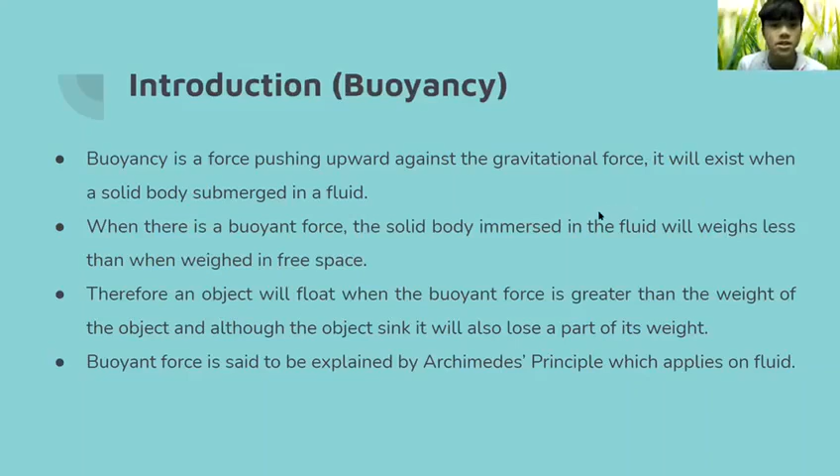And now this is the project that we are going to carry out, which is the emergency flotation system. It utilizes the buoyancy principle.

Emergency flotation system is utilized on a helicopter to maximize the chances of surviving when the helicopter is involved in either a controlled ditching or a water impact sinks.

An EFS has floats that are packed within spaces inside the airframe or fitted as externally mounted packs on the lower structure.

The floats apply Archimedes' principle, which displaces a volume of water to create enough buoyancy to lift up the helicopter when a helicopter crashes onto a water surface.

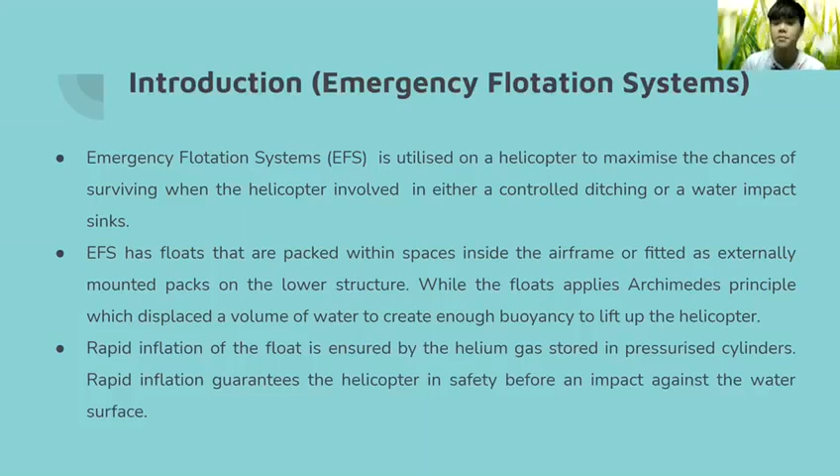Rapid inflation of the floats is important to ensure, and the work is ensured by the helium gas stored in the pressurized cylinders. Rapid inflation is important, as it guarantees the helicopter's safety before an impact against the water surface.

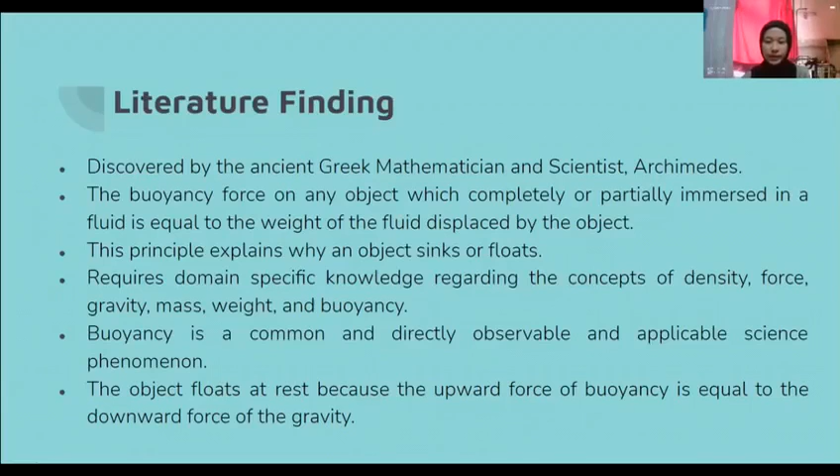This principle also requires domain-specific knowledge regarding the concepts of density, force, gravity, mass, weight, and buoyancy. Buoyancy is a common, directly observable and applicable science phenomenon. This object floats at rest because the upward force of buoyancy is equal to the downward force of gravity.

Next, I'll be talking about emergency flotation systems, EFS. These are designed to keep the helicopter upright for enough time to allow egress from the helicopter after a ditching. While there would be virtually no design possible that could mitigate against all rollover events,

a properly executed landing onto a favorable sea state should give the passengers and crew sufficient time to retrieve vital survival equipment and safely egress the helicopter into the life rafts.

The helicopter suffers from water rapidly filling up and sinking nose down due to the buoyancy force in the forward end, which is an additional hazard when the aircraft rolls over.

These flotation systems have physical limitations in that they are only rated to perform on given certain aircraft weights, sea states, and other factors. The reasons for these limitations are mostly self-evident, but relate to the ability of the EFS to provide its rated performance in the event of a ditching.

This is why emergency flotation systems are designed to keep the helicopter upright for enough time to allow egress from the helicopter after ditching.

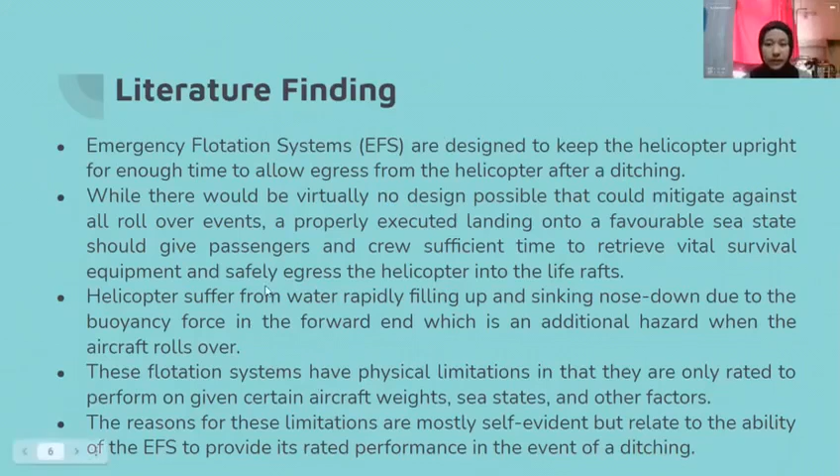Now I will explain this part, which is the conceptual part of the system. So, what is buoyancy? The Greek mathematician Archimedes expressed that the buoyancy force acting on a body of uniform density

immersed in a fluid is equal to the weight of the fluid displaced by the body, and it acts upward through the centroid of the displaced volume.

The buoyancy force equation above is used to determine the force acting on the object from inside the water. In general, the buoyancy force equation on a completely submerged object of volume V is buoyancy force equal to V times rho times G.

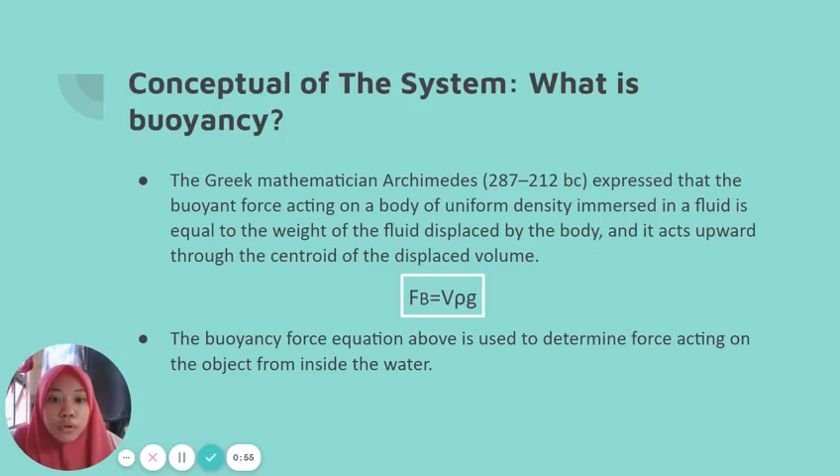In this study, we can calculate the buoyancy force acting below the helicopter. As you know, only a small part of the helicopter body will make contact with the water, so we need to calculate the volume of that part only.

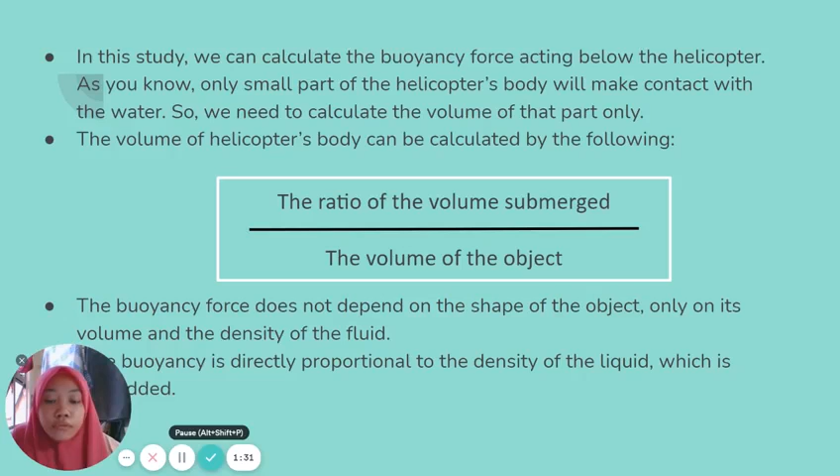The volume that sinks a small part of the object is the ratio of the volume submerged to the volume of the object. The buoyancy force depends only on its volume and the density of the fluid. Buoyancy force is directly proportional to the density of the fluid in which an object is immersed.

There are three requirements for floating. First, the buoyancy force of the flotation device should be able to keep the helicopter afloat during emergency water ditching. Therefore, float buoyancy force must be bigger than the weight of the helicopter.

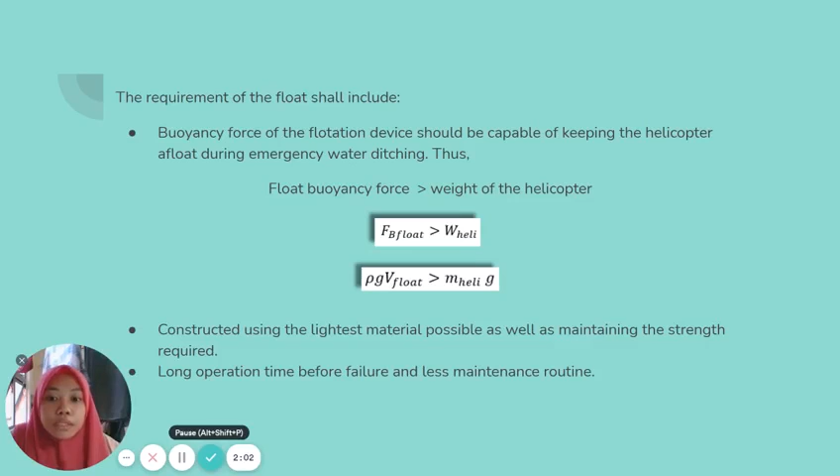Second, it should be constructed using the lightest materials possible while maintaining the strength required. Third, long operation time before failure and less maintenance routine.

For the floating device ideas, there are four points: inflatable flotation bag, inflation device and system, flotation mount and bag cover, and lastly, controls.

For the inflatable flotation bag, the number of float bags needed is 2, attached on the right and left of the skid, designed for stability up to sea state 6. The stability of the buoyancy depends on the center of gravity, which must be near the center of buoyancy.

Second, for the inflation device and system, the float bags are configured as a skid mount system and it depends on the landing gear configuration. The inflation uses helium blended with nitrogen since helium is a very light gas, which increases the buoyancy of the helicopter.

Third, flotation mount and bag cover. The emergency float bag is enclosed inside the bag cover in order to protect it. It must produce a nose-up attitude, and lastly, the bag cover must be made of waterproof materials such as nylon.

For number 4, according to FAA, the Federal Aviation Administration, there are 2 steps to activate the flotation system. First, the inflation circuit must be armed before landing. This is necessary to prevent accidental float activation.

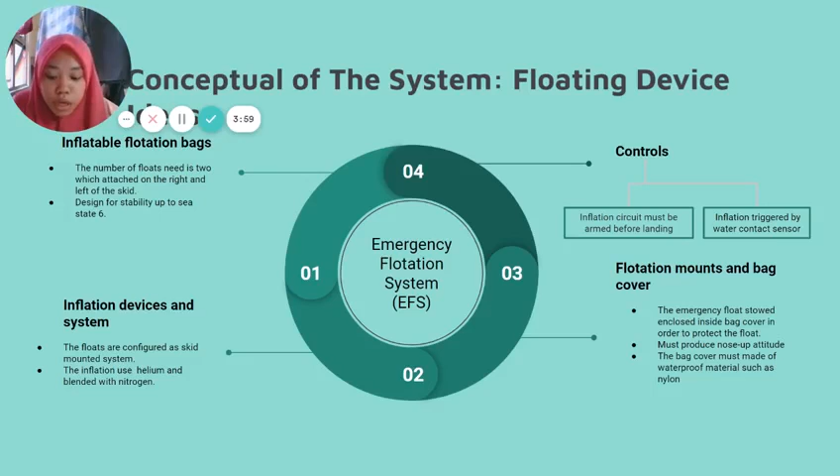For this part, I used CATIA V5 R21 to sketch the helicopter with the floating device. The dimension I used is centimeter, which is suitable for the model. I have drawn 3 models: 2 drawings, before the float inflates and after the float inflates, and also an additional improvement, which is a new design using a tri-bag floating system.

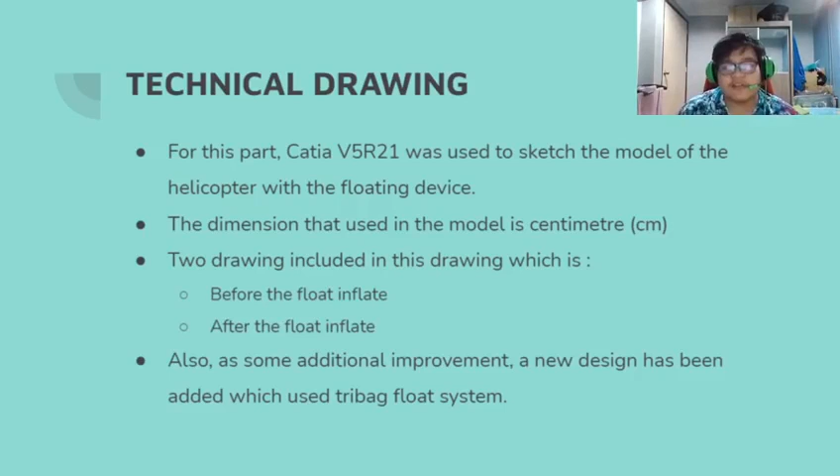So let's go. This is the sketching for before inflation, which as you can see there is a container, which contains the float that is not activated yet. So this is how the device will look.

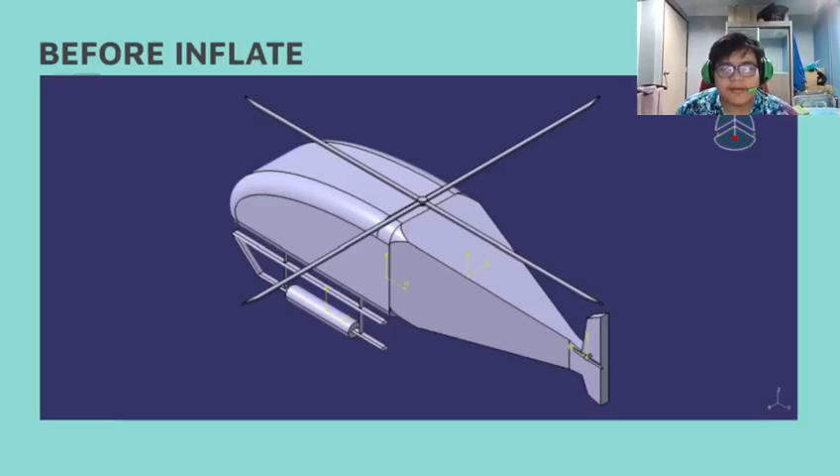Next, we go to after inflate. This is after inflate, which if the float is activated, the air in the bag will pump in, and then it will become just like a banana boat shape, but not too big like a banana boat - just a bit smaller, suitable for the helicopter. So this is the float that helps the helicopter float on the water surface.

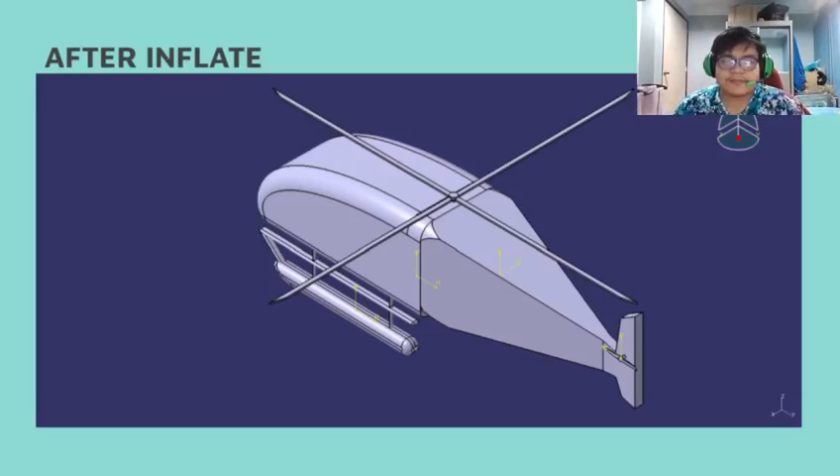Now I will go on to the float design improvement, using a tri-bag float system as the main flotation system, which will increase the value of buoyant force. If the value of buoyant force increases, that means it can support a bigger load, meaning more humans can be in the helicopter when it is floating on the water.

Next, the surface area will increase, which means increased stability of the object and also reduces pressure on the water surface. This is also good because it will remain stable on the water and will not topple down. So that is the safety aspect used in our improvement.

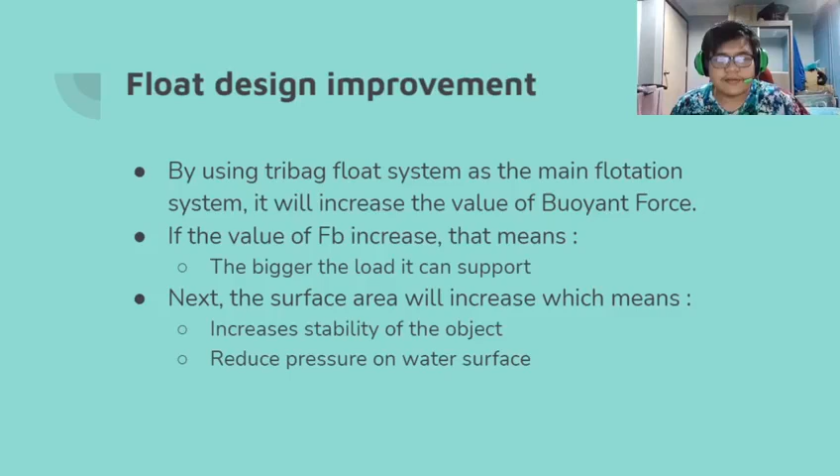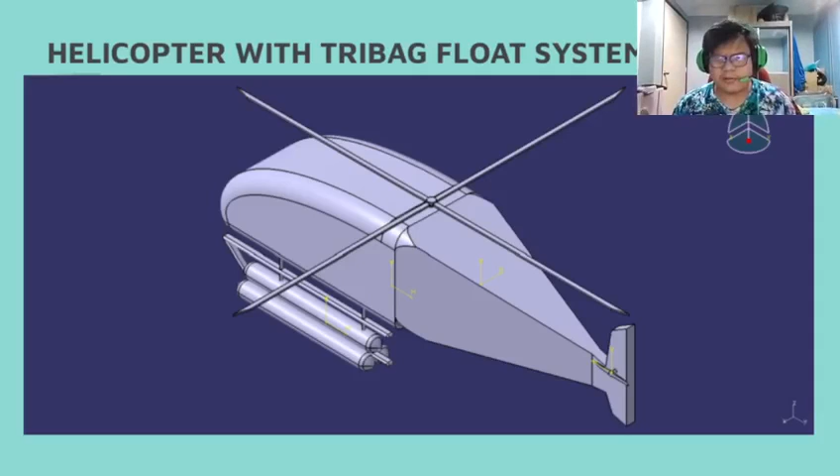So let's see the design. This is the design of the helicopter with the tri-bag float system. As you can see, there are three floats attached to each other, which gives more buoyant force, allowing it to support more load and also give stability.

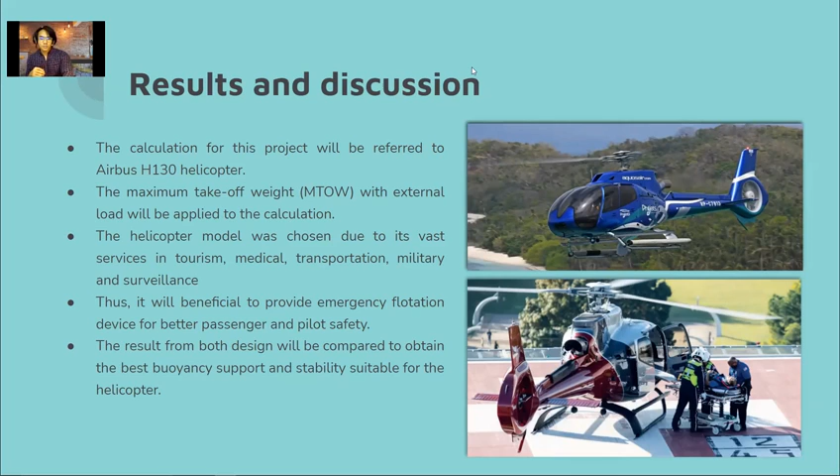Before moving on to the buoyancy calculation for each float, we need to obtain the volume for each design of the float. For float one, the dimension is 0.5 meter radius and 2 meter height or length, so the volume is 1.57 meter cube for each.

Since the float will be installed onto the helicopter, there will be 2 floats total, so the volume becomes 3.142 meter cube.

On the other side, for float two volume, the dimension of the radius has been reduced to 0.4 meter, and the height or length of the float is still maintained at 2 meters. So the volume is 1.01 meter cube for each of the float.

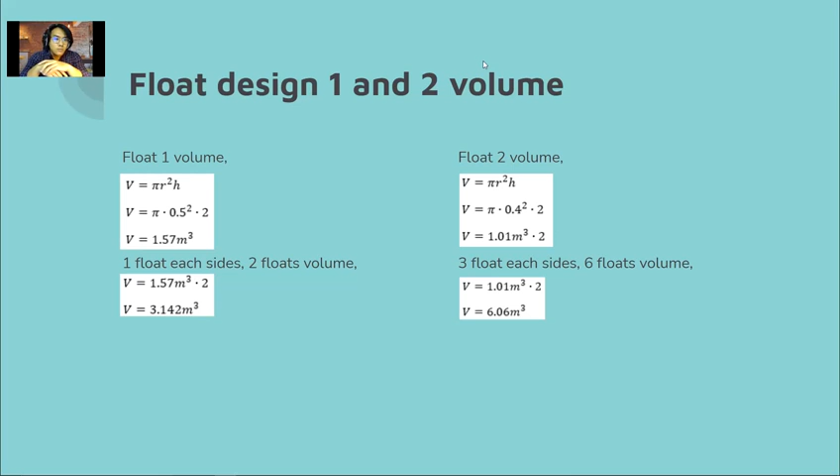Because there will be 3 floats installed onto the aircraft on each side, making a total of 6 floats, the volume becomes 6.06 meter cube.

Once we have the volume of the float, we can calculate the buoyancy force. But before that, the Airbus H130 MTOW with external load is 3,050 kilogram, which is equivalent to 29,890 Newton of weight. So the float one buoyancy force can be calculated, and the buoyancy force for float one is 30,699.2 Newton.

This value is not really a major difference between the helicopter weight and the buoyancy force. So this number is not convincing enough to make sure that the aircraft can stay afloat on the water for a longer period.

On the other side, the float two buoyancy force is 59,209.1 Newton. As we can see, the number is very convincing because it's almost double the weight of the aircraft itself. So there's superiority in buoyancy force compared to aircraft weight, and improved stability due to the larger surface area of the tribag design of float 2.

So float 2 has been chosen as the perfect design for this project. That's all from me. Thank you.

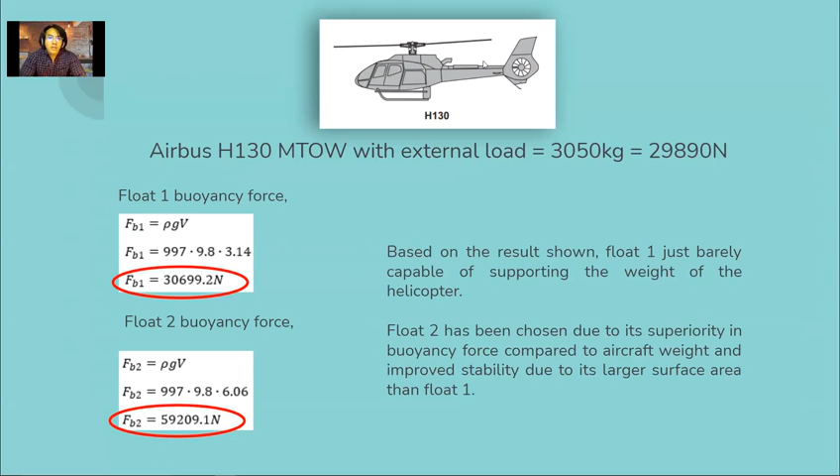Next, I'll continue with the recommendation for improvement of the project. Every project has its pros and cons, and we have to solve the cons. To ensure the safety of occupants on the helicopter, the inflation time should be as short as it can, so that the impact between the helicopter and the surface of water is buffered by the floats.

Due to the inflation of the floats, the principle of pressure applies. The problem is pressure build-up lags because of slow warm-up gas. Thus, an aspirated system should be tested in the next investigation, because an aspirated system is a lighter weight system which does not burden the weight of the helicopter.

To avoid tears and leaks on the floats, which would cause it to not withstand the weight of the helicopter, tough and elastic materials should be used for building the floats to bear the impact when the helicopter lands on the surface of water. To ensure the flotation system can withstand the weight and impact of the helicopter, a tribag flotation system is utilized instead of just one flotation system.

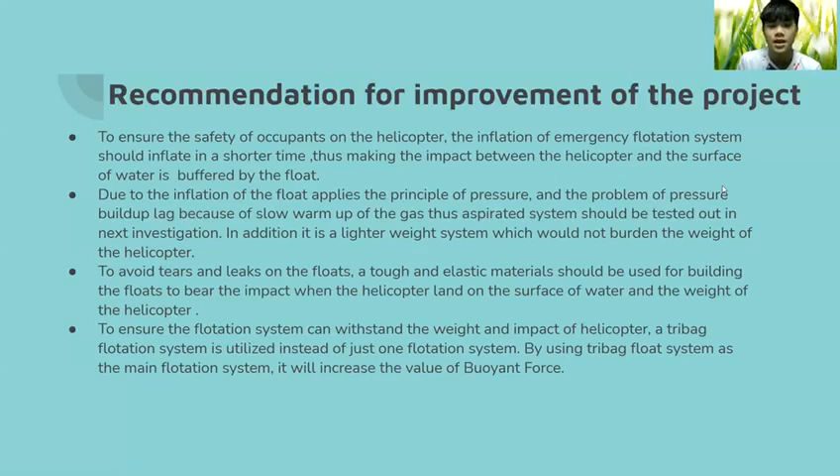Using a tribag float system will increase the value of buoyant force. Now I'll move on to the conclusion.

Buoyancy is an important principle utilized in every matter relating to floating. We know that the emergency flotation system functions with buoyant force, ensuring the safety of occupants on the helicopter and saving them from accidents.

In our project, we created a flotation system on a smaller scale, which can show the same function as the EFS, but what we created cannot be used on a real helicopter. So maybe we can try it on drones to save drones when they fall from an uncontrolled situation, and the drone will be protected from damage.

From the research throughout buoyancy and the emergency flotation system, a contribution to environmental issues can be found, which is prevention of crashes and explosions of the helicopter, ensuring there are no pollutants such as fuels or pieces of the helicopter sinking to the bottom of the seabed, which would pollute the sea environment.

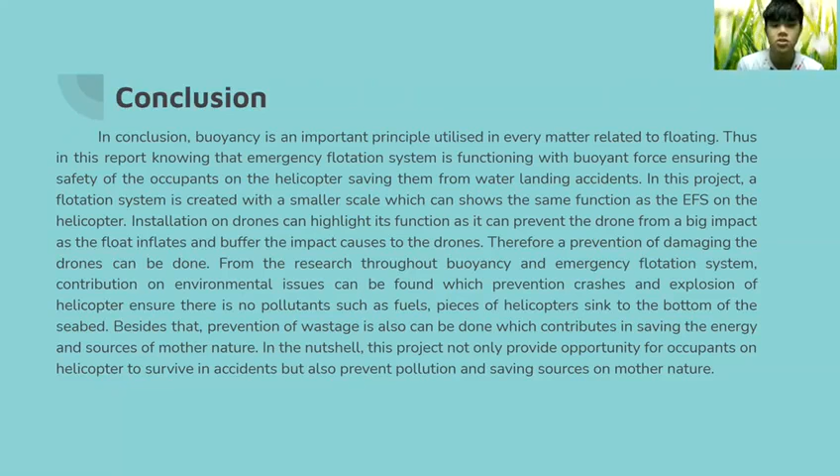Besides that, prevention of wastage can also be done, which contributes to saving the energy and sources of Mother Nature. In a nutshell, this project not only provides an opportunity for occupants on a helicopter to survive in accidents, but also prevents pollution and saves the sources of Mother Nature.

And I think this is the end of our presentation of this project. Thank you.